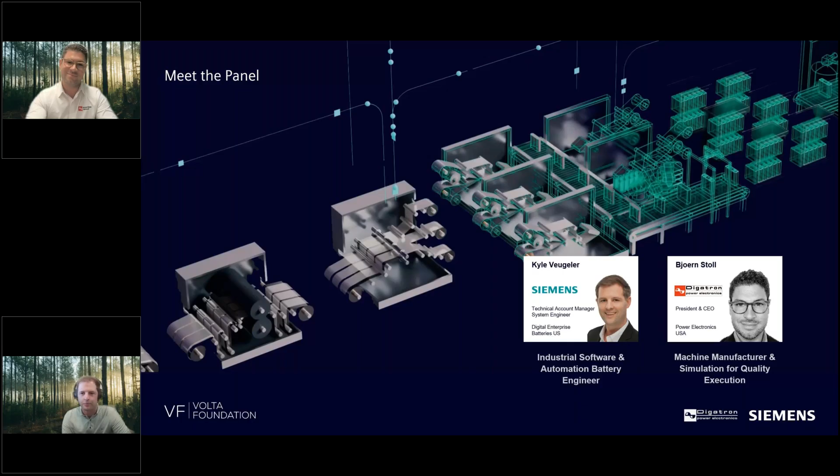Myra essentially came to us in both Digatron and Siemens and wanted to put something forward to the industry in terms of digital twin, some of the R&D design decisions that are coming out of lab environments, universities, academia. But how are we taking some of those findings using digital twin to actually go through that Death Valley gap of going into production, basically turning a coin cell into an actual cell for production for people to use within industry.

Some of the key takeaways that we've identified, both myself and Bjoern, were what can we do to use some of these tools for accelerating manufacturing ramp up, and for the design and production synergy. I want to make a call out here in terms of some of those design decisions becoming exponential downstream to many different stakeholders. Thirdly, the global partnership for production scaling, where Digatron's really going to speak to what they do with manufacturers, tool builders, system integrators, looking for some of the solutions. And then also enhancing market readiness in terms of what we're using on those digital twin systems, how to improve, iterate, and better the next variant of those tools.

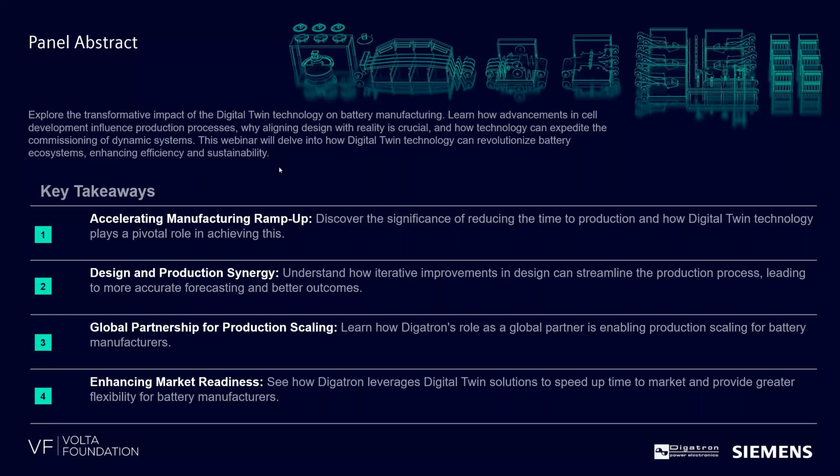Okay. So firstly, I want to explain my role within Siemens as a technical account manager. I tend to be a guide in some cases. Sometimes it feels like cheating. I've done a lot of these problems over and over again for the last 5 years at Tesla and others. But a lot of these customers are really starting to understand the value of digital twins. And every battery manufacturer, tool builder, system integrator is at a different point in their life cycle of defining the problem, solving the problem, and then expanding that problem solution set.

I want to give the industry at large here on the call today an idea of what I'm seeing, regardless of customer, form factor, chemistry, what we're asking ourselves and how we're helping solve some of those problems. So firstly, a lot of the simulation of old from aerospace and automotive really becomes what are the limiting factors, or front-end engineering simulation tools to define some of those key metrics. We do this in academia, we do that in research and development. We do this to define what it is we're trying to achieve on a simulation basis.

Also, the one that really has been a foothold over the last decade has been, how do I calculate my orchestrated operations? If I need to do 5 gigawatt or 10 gigawatt, how many tools do I need? Do they orchestrate well together? Is there a need for a buffer system? What's my consumption rate? That has been a simulation tool we've been using within industry for many years.

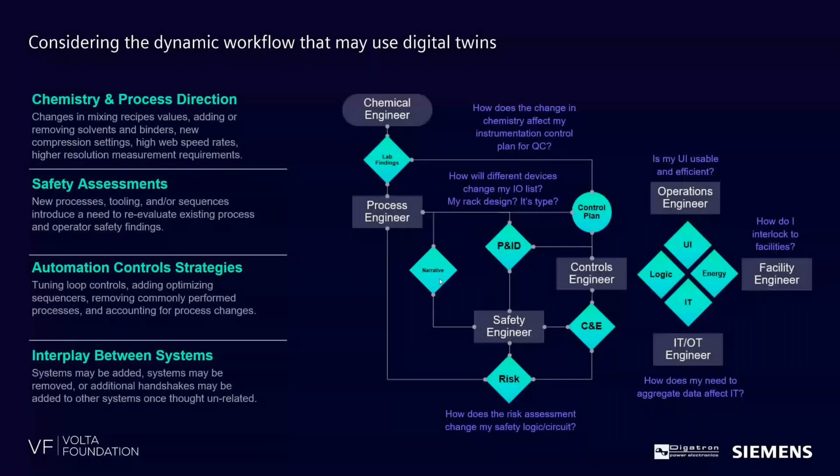I want to give an example of how that becomes a problem at scale. So say you're in the research and development team and you're looking to do something as simple as, I want to change from NMC 811 to NMC 955. You're not going from NMC to LFP, you're not going from pouch to prismatic, you're not doing a vanadium battery change from a lithium ion, you're just changing the recipe within your dosing.

But downstream, you start to see drastic effects as it goes down to the different organizations, and it becomes exponential in nature. And I'll explain why the simulation tools and how they're interconnected help bridge that gap.

So in NMC world, you're going to change something like the amount of kgs of your binder, active materials. Those will have different physical properties, and they will have possibly different means by which you can measure bimodal distribution or compression or thickness of your electrode. Everything will change based on just changing something like this. And you're changing that for that reason, to actually have a better battery.

Now, what those teams in R&D are doing is they are trying to solve for these key quality gates, as it were. Like, we want to have a defined particle size or a different modal distribution or a viscosity or a granularity test for dispersion. They're defining based off this, those will change.

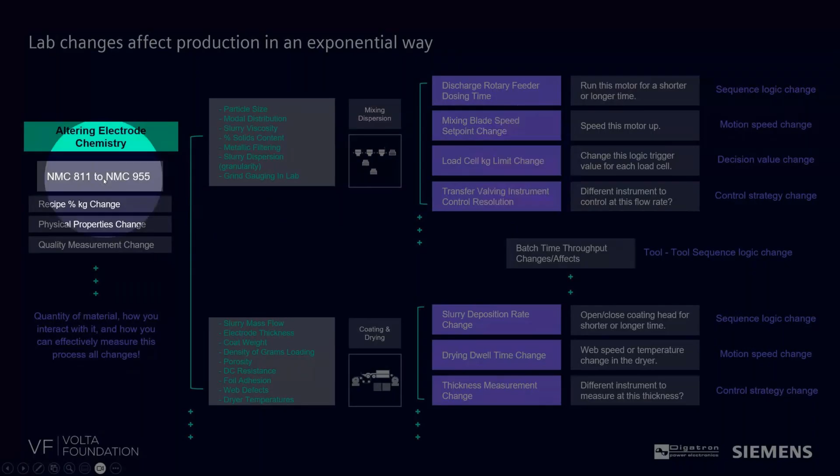When it comes to the controls and automation side, and even the mechanical side, a simple change like this can change, okay, my dosing time is radically different now. I need to change the program by which that machine runs, and now the startup and shutdown of that tool affects an upstream or downstream tool, and so on and so forth.

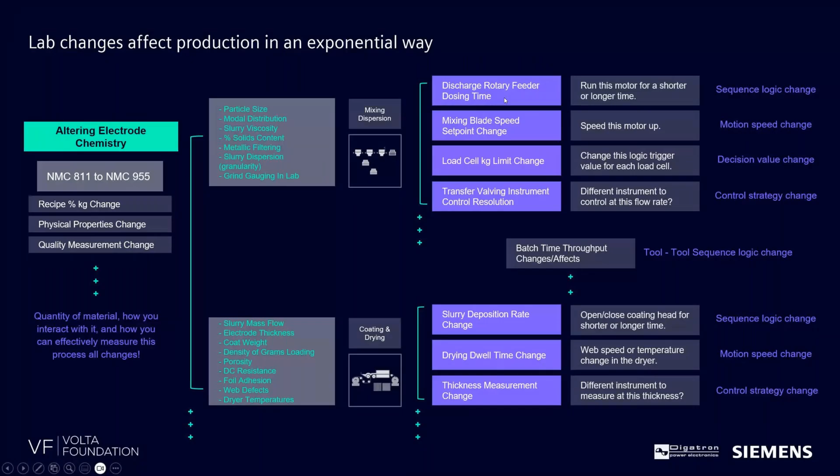But the goal here, I hope the team starts to take away, is that a small decision, asterisk on small here, from NMC, just the dosing recipe or the chemistry, massively affects people downstream. Now, how do we tend to see this play out when it comes to industry?

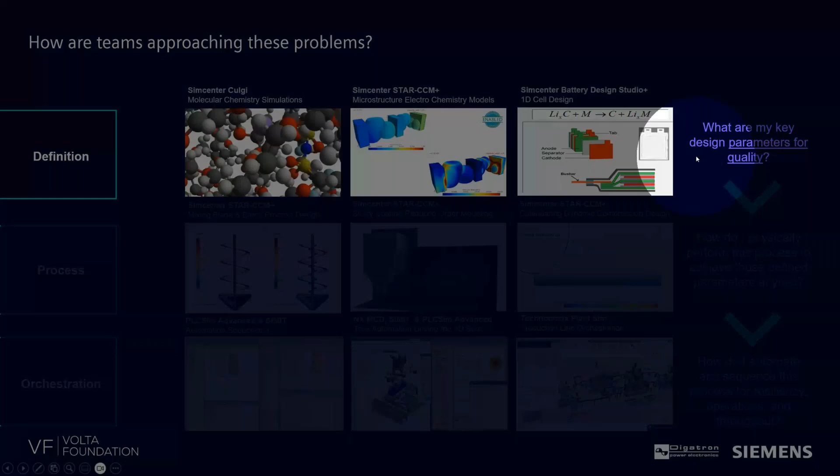There's three main hallmarks when you're tending to approach this problem. Your organization might not have the stomach to digest how big your appetite might be, but more or less this holds true. The beginning stages of defining what is your chemistry, what is your process, those teams are looking to solve for what are the key parameters for quality. What are the things that I need to attain in a coin cell that I need to take out of a lab into mass production?

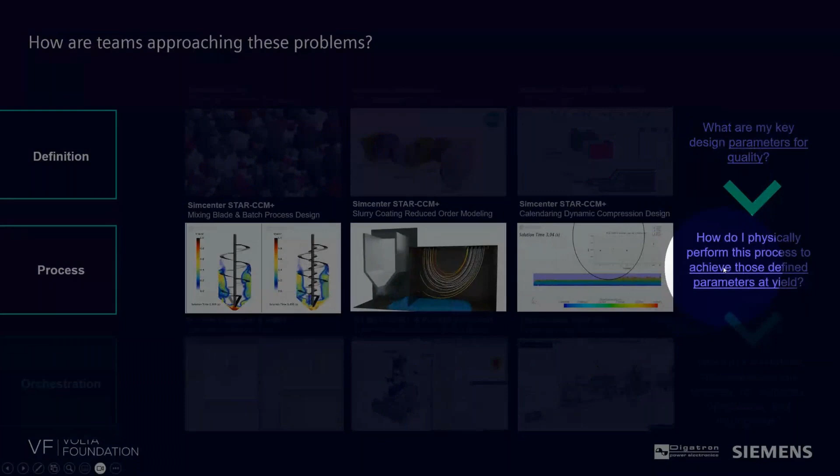The second wave tends to come with defining your process. Simulation tools here tend to be focused less on what are the key parameters to build, but more so how do I define the process by which I can do this at an industrial level, at scale, at a repeatable, resilient level. Within Siemens, we have aspects like CFD modeling or full-blown front-end engineering, multi-day, multi-hour simulation tools to define this, from atomic all the way up to CFD modeling.

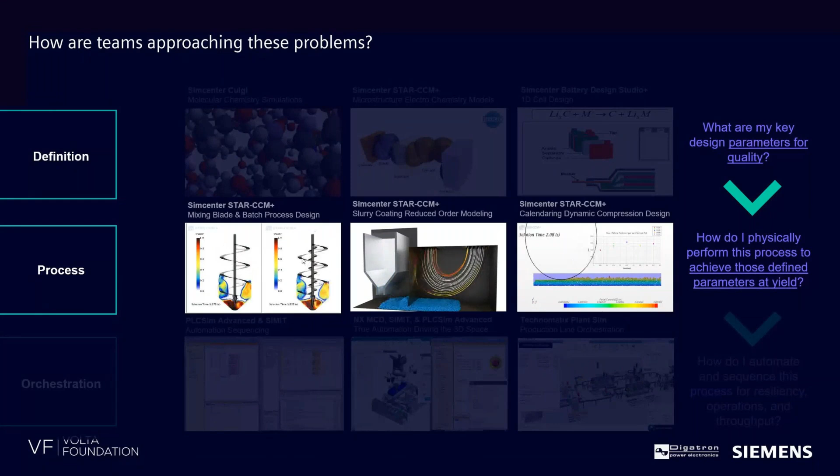Now, this is an art form, to say the least, but what we're starting to see in battery today is the tie points of that front-end engineering into the actual automation and how we can play with that interlock system.

We're seeing a mass adoption here in terms of simulating the automation and the manufacturing tools together. So when it comes to orchestration, you may want to simulate something like the PLC to validate the startup or shutdown sequence, a safety event, an e-stop event. This becomes far more important when it comes to battery and some of these continuous processes.

The analogy I tend to tell people, or use case I tend to show people, when we design safety for these tools, let's say it's a compression system, and I have a large calender. When you have an e-stop programmed into that system, A, they take hours to start up and shut down, but B, the e-stop is meant to protect your operators, or possibly the process in that case. There may be a hidden ramification for that e-stop.

Say you hit that e-stop, yes, you protect an operator from being crushed, pinched, whatever that might be, but it might come with a $100,000 price tag to resurface your calender facing over in Switzerland, or something to that effect. Being able to simulate, A, how this tool individually handles startup, shutdown, safety, how it works by itself, is important. But especially when you go to the gigafactory scale, how does my mixer dose into my compression system?

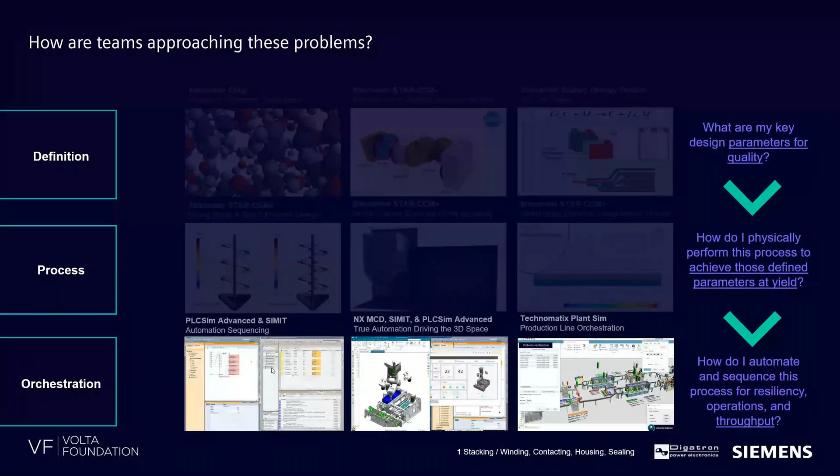How do my compression system and my coating system feed into my slitters? When I have these different tools, how do I work them together? This is where we're starting to see a lot of adoption in the industry in terms of validating this today. Hallmark here, like I said, there's front-end simulation tools for defining what your quality is and how you build your cell. 2 is the process by which you do that at a scale. And 3 is defining what your throughput is and how does it all work together.

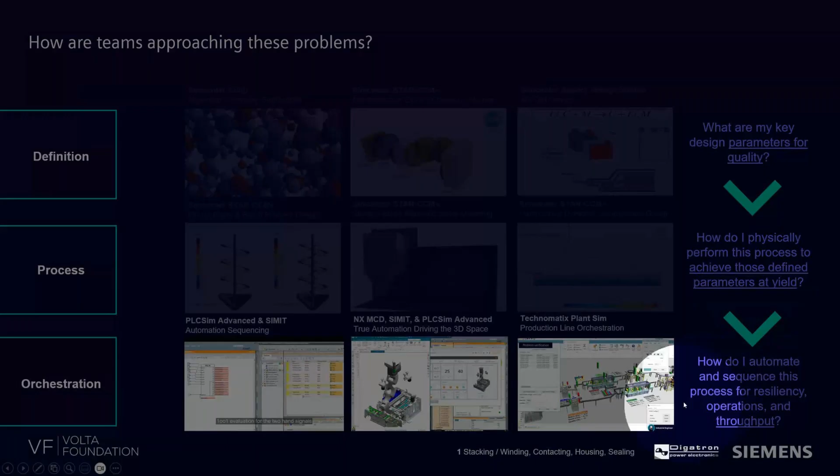So you're looking at quality first and foremost. Second, yield. If you're going to be selling batteries and you have 10% yield, you're going to go out of business. 3, throughput. You're a battery company. You might as well have a good throughput in terms of producing cells that you're looking to achieve.

Now, I want to give an example of some of this proactive validation that we're seeing across the battery side of things. This is an example of tying those simulations from a top-down approach towards the production line. So in this case, this is showing that play and how they somewhat overlap and can feed back into each other to characterize maybe I need a twin blade mixer, or maybe I need a different 40-ton compression on this electrode film because I have a different ratio up here. In this case, you might change your recipe. You might have a higher compression percentage that's required.

You need to validate if I add Si, or silicon, if I want to go down this road and alter the more modern anode side of things, getting into the material properties like a Young's modulus and looking at thermal conductivity. This tends to live in this world up here. But you're still solving for something that these need to achieve.

So if you take nothing away from today, there's many different digital twins and simulations that are available to you. Not everything is one size fits all, because you do need massive data modeling to do atomic structure simulation, where you don't need to do that when it comes to other applications. But those key parameters that you're defining up here are what this is achieving. So this is where we link them all together at Siemens today. So you're analyzing, you're finding these parameters. This is that Goldilocks zone of this team interfacing with the other teams.

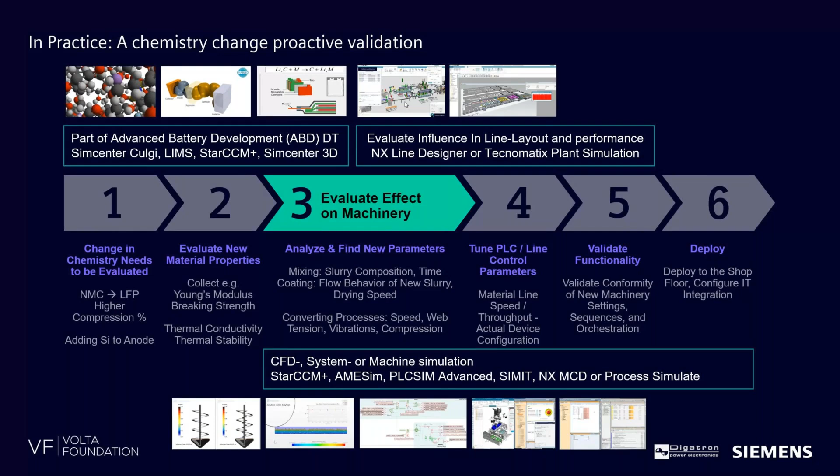In the past, if they weren't linked, someone would change something down here. It would not be reflected in the main line throughput design. Like, say we change a proximity switch on a pallet. This is no longer equivalent to what's on the production floor. It can die and wither on the vine in some cases here.

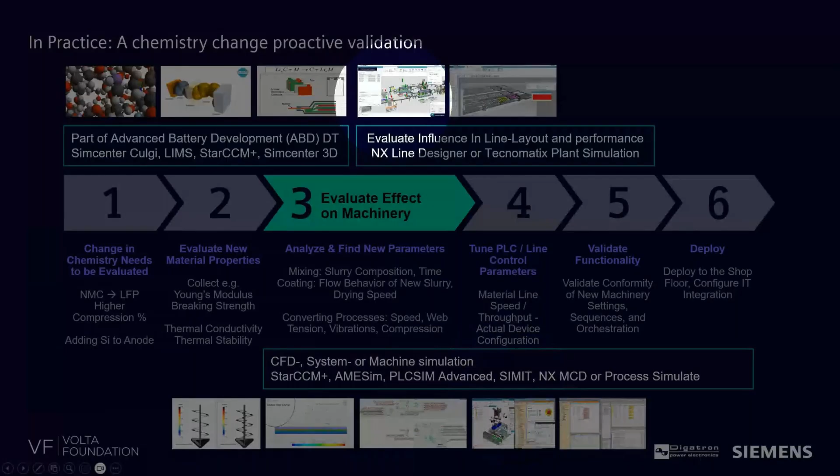Those organizations have a really good understanding of what it is they're trying to achieve for the parameters set. That's great. In most cases, you're starting to see, I have an idea of what my line needs to be, how I should size it, how many lines, but they're black boxes. And then they look out to tooling suppliers to say, hey, solve this one box of the 20 boxes according to my parameters.

And then as that process plays out, you start to understand, I have no idea maybe how that machine works at the fine-tune level. I have a general idea of this tool. I have a really good understanding because maybe I have a novel process on how I coat or how I do a certain process in the system. But you're starting to get a general idea of how those work together. And this is really where the problem of simulation tends not to take too much of a hold.

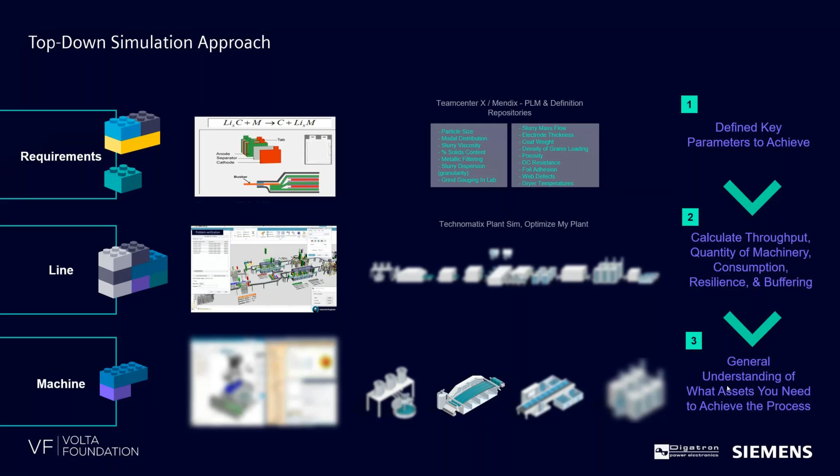The modern advancements of the last 4 years in our communication speed and compute capability allow us to go to this bottom-up approach as well. So you can still start with the top-down, rough it all out into these different chunks that you can solve and move forward with. But now that we have the ability to take the PLC data and the actual automation quality parameters, we can start to push that back up into that production line model instead of, I have an 80 meter a minute metric for my coating line.

No, I want to tell you the exact speed reported from the servo drive on my coating roller journal, my main drive line. We're bringing those into the line simulation to say, sure, you can simulate it. We can now take it and characterize that based on real world characterizations and observations.

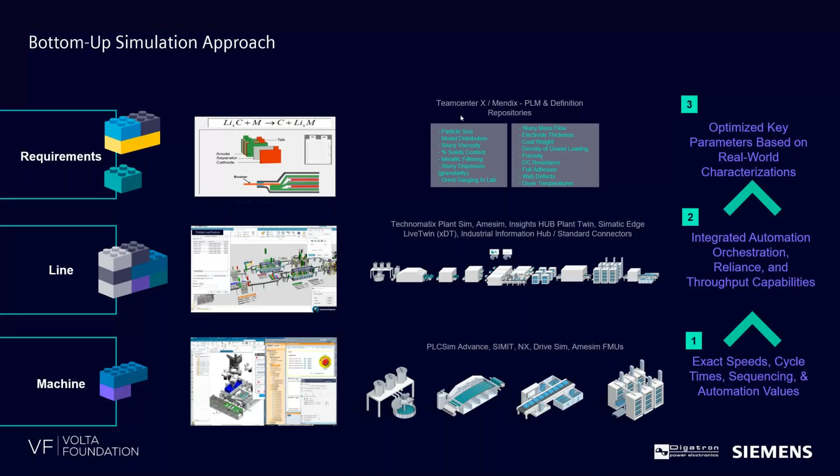And what you're starting to see is you can actually go through and figure out bandwidths or phases or gates that you can see on the different particle sizes. If I go past this threshold, I really need to radically change my production line or my manufacturing tooling provider because of this. That is incredibly important for the team to hopefully take away here.

This here is kind of an overview of what I depicted earlier. It's really more an aspect of, I want to make sure people understand there's definitely a time and a place to understand what is my simulation in the early days for understanding the atomic structure of my cell, maybe a smaller market, more niche. There is an OEM tool builder system integrator suite in terms of understanding how should I design this specific tool or optimize it or iterate upon that.

And then also lastly, there is a massive push for creating digital twins to validate sequences. Me personally, I did not want to go do a factory acceptance test over in Korea or over in Switzerland, wherever that might be. If I can virtually take a look at this program, validate it is correct for what I need, I'm not going to go over to a supplier, yell at them for color codes and naming conventions on the automation. I'm going to use my time well.

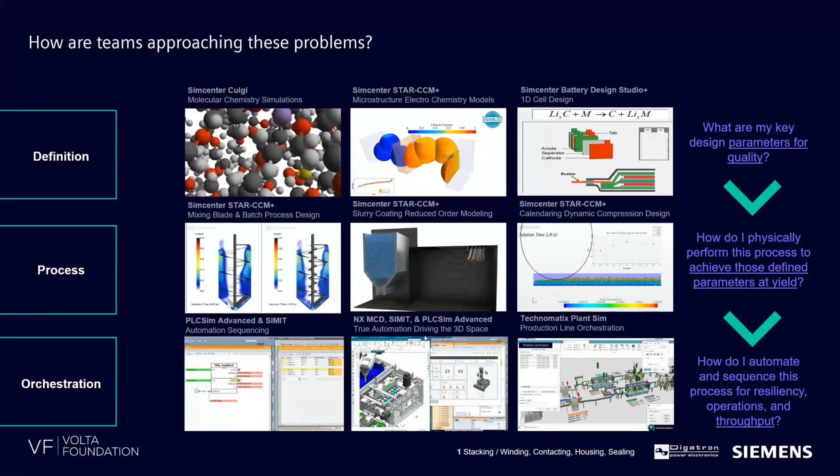Second to that, operations for battery. All of you are very familiar with this. We tend not to want to start and shut down these production lines. So training your operator and your workforce in a virtual environment that doesn't have a ramification for an e-stop or a plugging of a loss-in-weight feeder, whatever that might be, really de-risks your operations and training and your iterative design for the future.

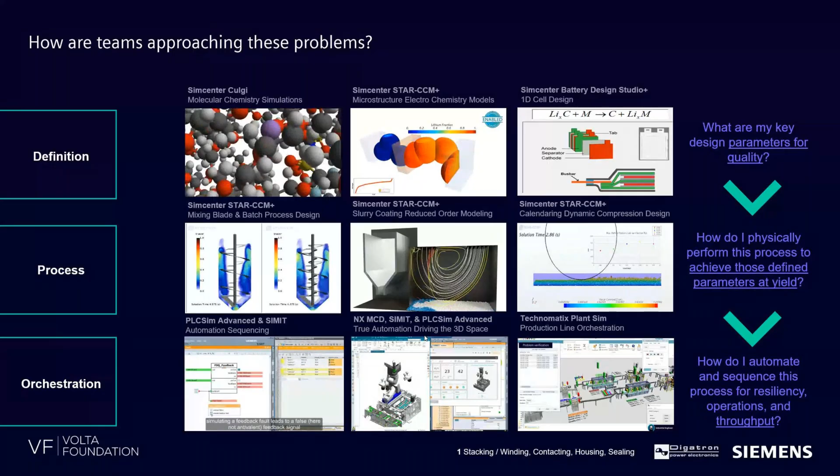Lastly, what I'll say with this is more of a US topic. I'm seeing a lot of manufacturers. Maybe you're a tool builder and you source to Georgia Pacific in the converting industry, or you do food and beverage boxing like a Tetra Pak or others. They know web handling and coating quite well, honestly. They're looking to say, hey, what if I just throw electrode into this instead of pulp and paper?

The digital twin allows them to create their tool, validate some of those metrics in place of saying, I want to buy a $3 million CAPEX, build the tool, then figure out if I can do this and sell it to someone. This is one of the unlocking aspects for tool builders within the US today to say, can I move from that industry over? I don't want to bring lithium into my building.

I don't want to spend $9 million on a formation, aging, and test structure and float $9 million for a year long. I want to create this, show it to my potential customers, and I've already done 30-40% of the design work for when they give me a PO to move forward with this. So it's really helping deleverage industry adoption into battery as well, which has been really helpful in the US.

Okay. Aside from that, I wanted to paint the ecosystem as I'm seeing it across manufacturers, OEM tool builders, and system integrators. Now that we can understand at least the ecosystem of what people are asking and the take rate for things, I really want to hand this off to Bjorn, who can speak to what they've been doing at Digatron in terms of the tool design and using some of the digital twin aspects.

Bjorn, it's all you. Thank you very much, Kyle, and handing it over to me.

As we discussed at the beginning when we prepared our presentation, my focus in my previous role was using Industry 4.0, IoT, Internet of Things, digital twins more on how we can increase productivity. This has changed after not only our conversation, but also in the market, talking to our customers. And the major topic and the major focus is safety, risk management, and quality.

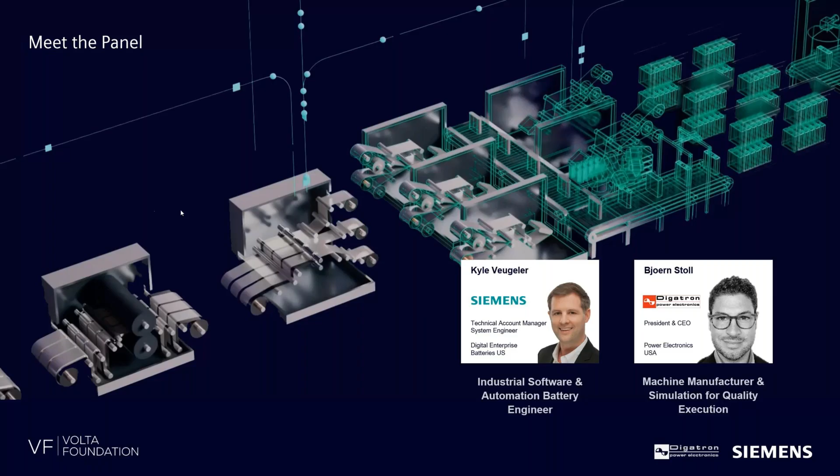Risk management on the financial side, on the downtime side, and that includes also what you have presented on the change side. But as a manufacturer of machines, we are focusing on the development side before we are building the machines. So if you go to the next slide, please, we have an example of how we are doing it at Digatron. For example, over here on a pouch cell. So we are starting the dry side. That means that we're starting on the anode and cathode cutting side.

Previous topics which Kyle presented, mixing, changing chemistry, are impacting us later on. And that's the reason why a digital twin can help us in the entire planning phase where we need to focus on safety, quality, and risk management. Hence, we are starting with single station units on cutting, and then we go through the entire process flow. This is only for pouch. We have the same for prismatic and for cylindrical cells.

And while we are having single station units for every process step, it helps us and the customer to really see in the development phase where they need to have automation, where they need to increase their safety aspects, where they need to change something before they're making the investment. And that's the reason why I'm talking about risk management from the beginning, to avoid investments which they're later not able to use or need to change when the customer has installed the units in the factory or in the development lab.

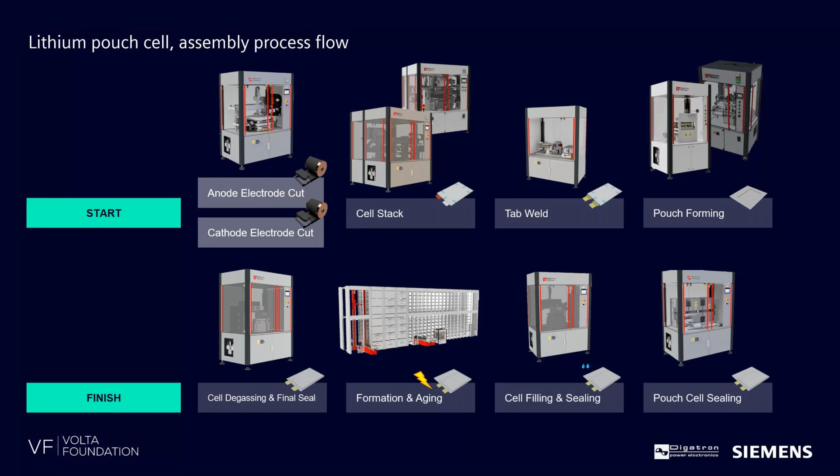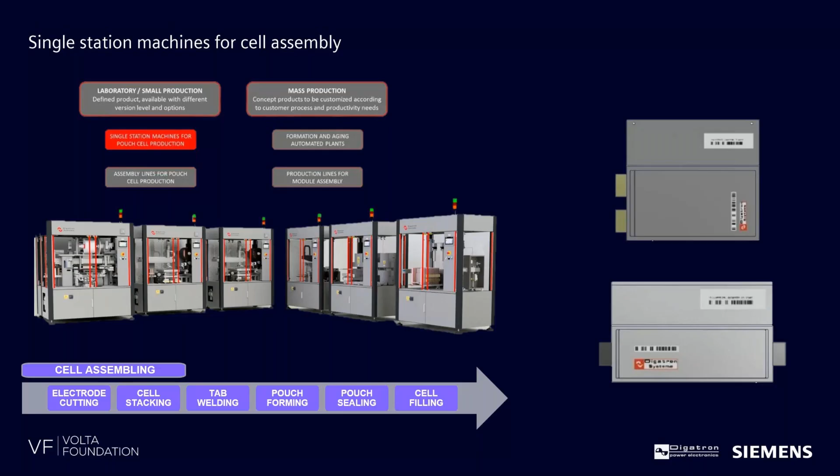So hence, we are going to the next slide, please, Kyle. We have the single station units on the lab side. Later on, we are going into mass production, and that's the reason why the digital twin can also increase the amount of cells you're producing every day. So you can scale it up, and you can see where in the process an automation makes sense, where you need to have quality inspection in place in the process, as well as where you need to increase the amount of machines to achieve your manufacturing output and quality you have promised to your end customer.

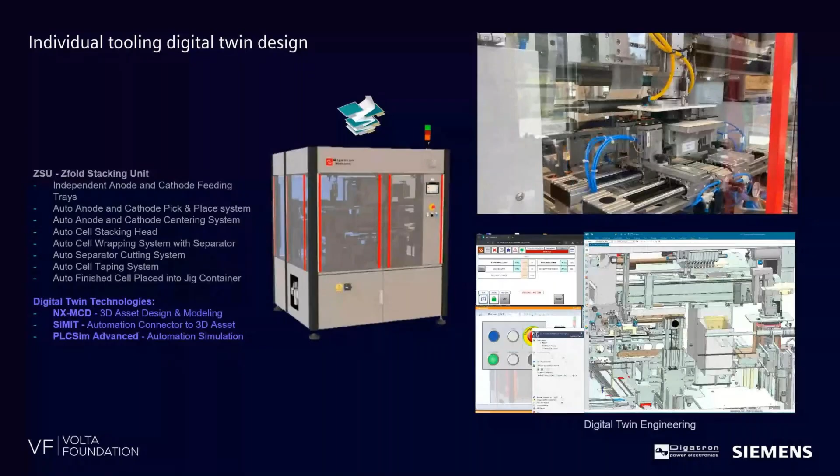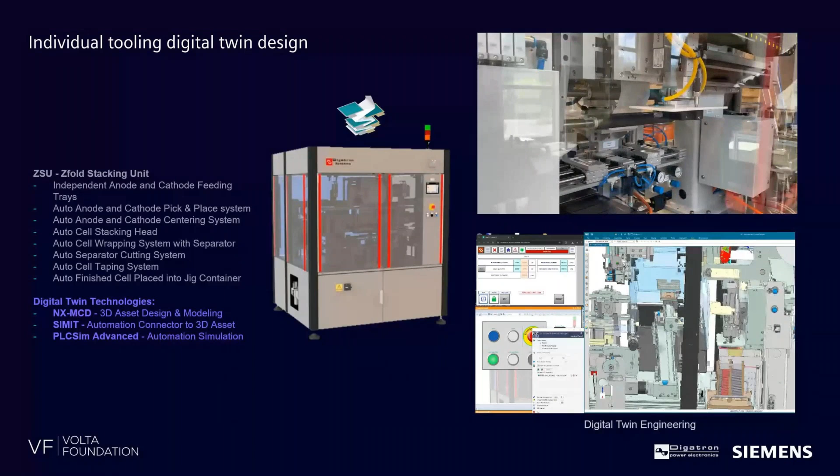So for example, we have over here a Z-folding stacking unit where we have a digital twin on the right side below, where we started to simulate the entire process to do Z-folding above. So you can see below the digital twin is showcasing exactly what the machine at the end is doing when we have installed it at the customer side. And we are using the simulation for all machines along the entire process flow, which I have shown in the slides before. And we are analyzing where we need to increase speed, reduce speed, to have for each and every process step the entire quality parameters fulfilled.

Kyle, would you like to go to the next slide? Perfect. And talking about later on, while we're having for each and every process step a single station unit, we can increase our capacities accordingly and automate it when we have the digital twin along the entire value stream. Hence, we are using the machines and putting them all together and doing the automation according to the customer's requirement, where they don't like to have manual handling. We're doing an automation and a conveyor belt handling.

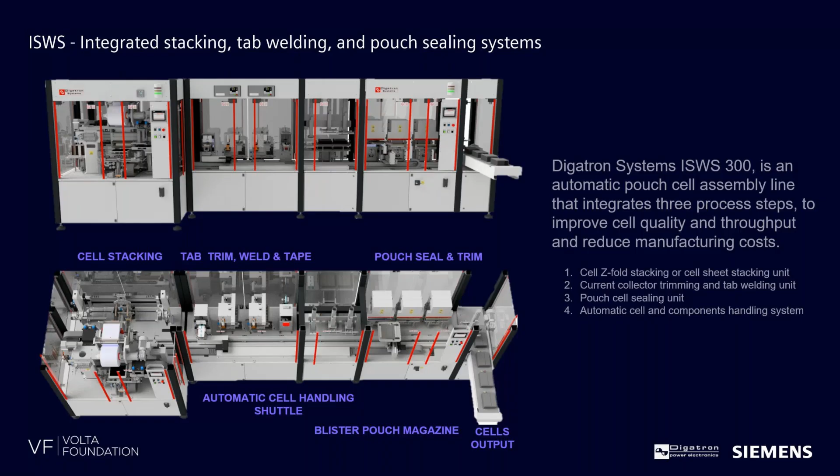Once we have manufactured our cells, we want to evaluate the cells. That means not only for incoming cells when we have the cell manufacturing process outsourced, but also when we're producing cells before we go to the formation.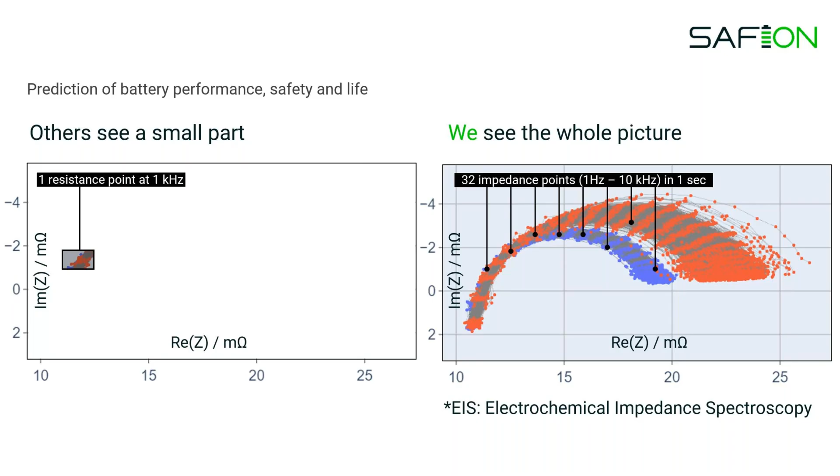On the left side, you can see a conventional impedance point, 1 resistance point at 1 kilohertz. With our system, which we are installing, you can click on the right, Kyle, please. We can show 32 impedance points per second. This helps us to really evaluate the cells and predict the lifetime of the individual cell before we put them into a module and then later into the pack.

When we go to the next slide, Kyle, you can see an example of cells coming from the same batch, but each and every cell has different quality parameters. Hence, with a digital twin, we are defining the ideal quality level of the cells we want to produce, and later on we can measure it against the reality.

On the left side, batch 1 has a longer lifetime, batch 2 has a shorter lifetime. Hence, we can do the cell grading and put the batch 2 cells in a module, avoiding mixing batch 1 optimum cells into a module and making the module and the pack weak at the end. On the right side, we can see the instant battery lifetime prediction. This runs against the model we have created in the digital twin, which runs against the reality.

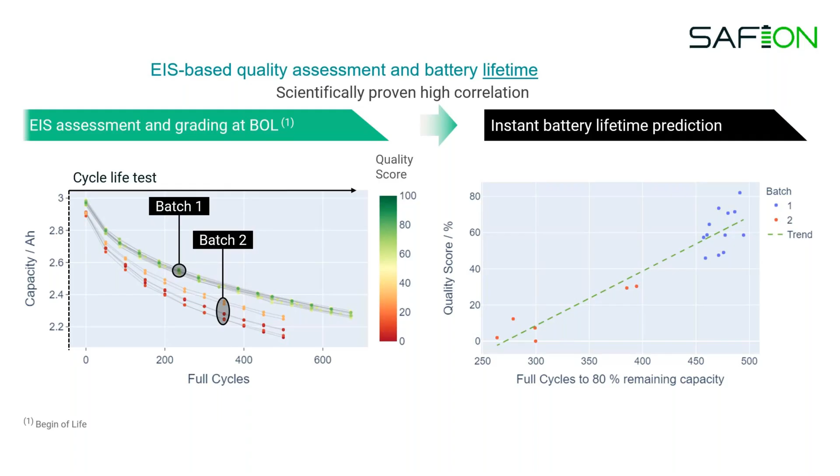These process steps make it possible to do the cell characterization of a single cell, or a string characterization where we put multiple cells into our system. While we are doing the electrochemical impedance spectroscopy, we are measuring current, voltage, temperature, and cycling the individual cell through the required formation process and/or for a lifetime prediction of the individual cell.

If we go to the next slide, Kyle, this will help us, and most important, this shows the customer how to avoid unnecessary formation and aging, which is one of the most expensive parts when you have produced a cell that does not fulfill the characterization defined in your quality characteristics. Hence, we are installing our EIS measurement system after the cell manufacturing process, before the formation, and according to the quality process definition also after the formation, before the aging.

Coming back to the digital twin, what we are doing with the digital twin is showcasing here the entire process flow. Can you go back, please? One back.

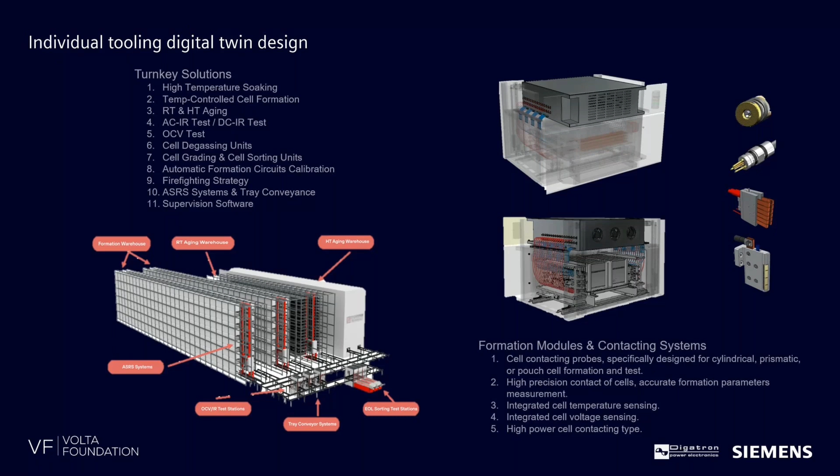Perfect, Kyle. Thank you. Can you go to the next slide? Here is an example, and I'm not sure, Kyle, if this is a video as well.

We have used the digital twin design to design a warehouse, to design the formation process, to define the entire material movement between the individual steps before and after the formation and aging. Kyle, would you like to explain how we have done it?

Yeah. So circling back to what I was talking about earlier in terms of this building block approach, going from the bottom up, what Digatron has been doing so far is we are simulating the PLC. Then we're simulating how the PLC actually moves mechatronics on that side of things. That was the single cell station that we looked at earlier.

And then when you start to scale, you're using those same assets, but it's pulled from actual automation, actual characterized events from production, so that when you start to get to this throughput line design aspect of, okay, where are my bottlenecks? Do I need to add more pallets to the line or remove them? Do I need buffers?

Or one recently was my anode and cathode coating line. My cathode is 3.1 meters and my anode mother roll is 2 meters. So even though they run at 80 meters a minute, you need a buffer on the one because the cycle time is going to be different. This is where you start to see those building blocks start to work together on the bottom-up approach.

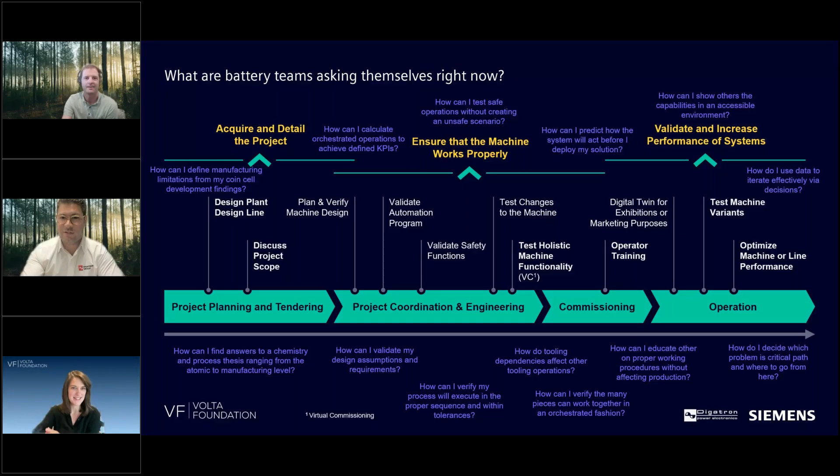15, 20 minutes of questions. It's like a thesis defense. Are we ready?

I'm all for it. All right.

So I've noticed a few questions coming in around chemistry, so upstream chemistry, and how this may affect the downstream processes. One specific question around line speed in chemistry. So let's start the discussion with: if we're talking about beyond lithium, different chemistries, alternate chemistries, how does changing one element or parameter within the chemistry impact the downstream processes?

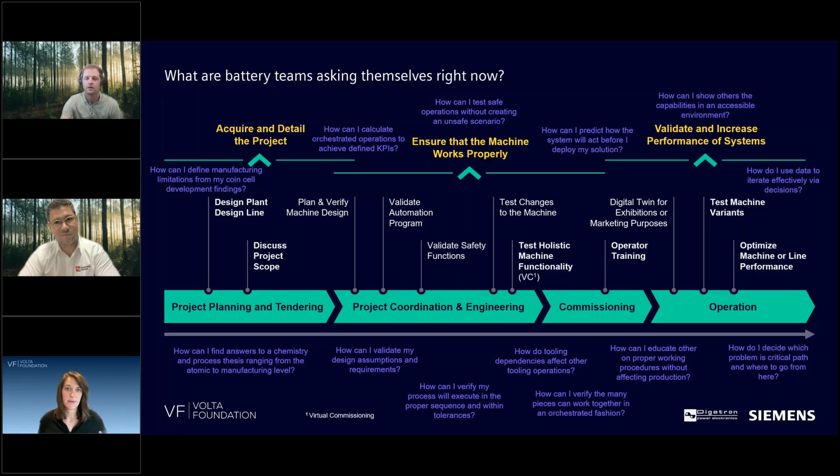Yeah, I'll take that one, Bjorn. This image here, I think, is a good depiction of that. So, like I mentioned earlier, you might change your chemistry. Therefore, you might have more metal in that composition when you're mixing or whatever that might be. That's going to change your slurry, or if you're doing a dry process, how your compression is going to be forced on more metal to compress. So you might go from 10 tons of force to 40 tons of force. That changes how we program motors, how we program instruments. Can we even measure at that thickness of what you're trying to achieve? That starts to be the downstream effect.

So we can simulate in the front end engineering what should be my new compression force. We can go into our automation in our 3D environment and say, can I even achieve that? Can I turn the motor up high enough? Can I even get there? Where are my limiting factors there? And you can pre-validate that in some cases.

And plus, obviously, changing the chemistry is having an impact when you're producing the cells, and also when you're doing the formation of the individual cells, because the formation profile will change or may change, and the formation process takes longer.

Okay. Thank you. And then, did you guys touch on... it's having an impact, you walked through. So specifically to line speed, are we able to comment on specifics on line speed? Yeah, I'm not sure. Yeah. I'll take a non-NDA, IP-tied answer to this one as best I can.

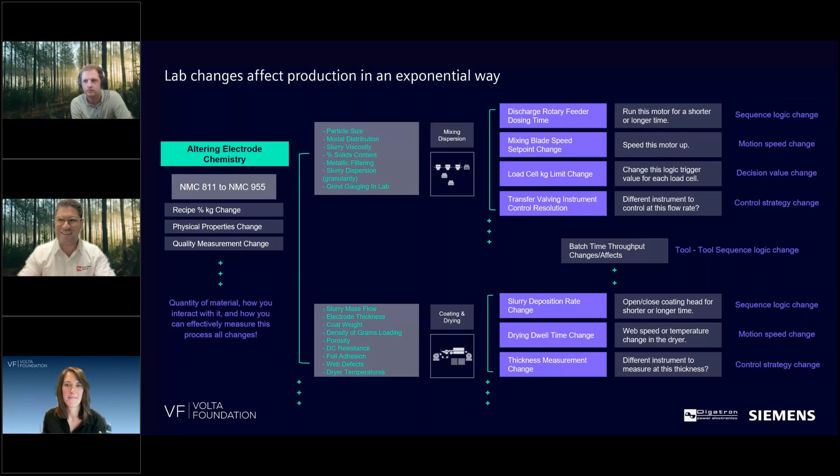Do you want to go first, Bjorn, or do you want me to go? Yeah, just one comment, because it's the big advantage, and I have seen another question which I liked: how can you put different machine manufacturer equipment into the digital twin? This is an important factor, because if you have just one manufacturer in line, you can't predict, and that's the reason why it is so important in our point of view to have really turnkey solutions and work with other companies together to really work on safety.

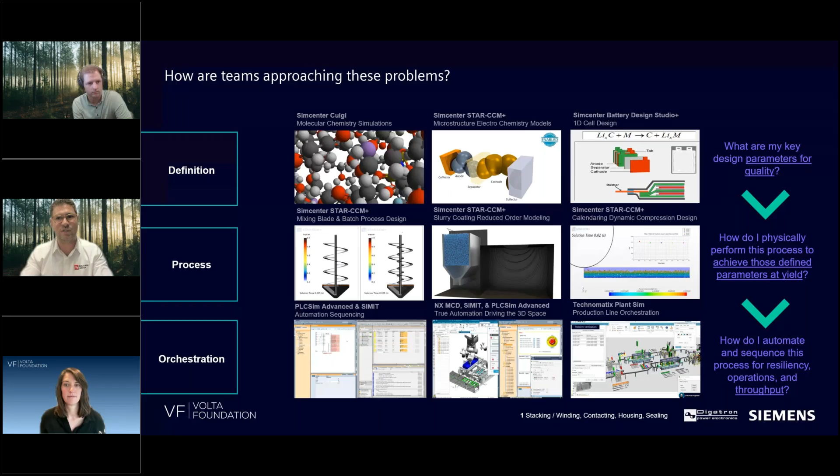And safety is the most important factor in the entire manufacturing process, because if there is a fire or people are dying because of any kind of event which would be possible to protect against before, if you would plan it in a proper way, I would say including the entire value stream in this digital twin makes sense to at least foresee some catastrophic events. Just my comment before Kyle's explanation on how to do it. Yeah. So catastrophic is a bit nebulous, right?

But yeah, when it comes to this, what I will say is, in terms of the actual automation simulation, I'm seeing a big uptick on this being part of that conversation. So what do I mean by that? A startup and shutdown sequence is very coordinated for your production line. Say you lose a connection to an abatement system, let's say an ammonia scrubber on a coater. You cannot run that coater. If something fails on that, you do not want ammonia in that building.

In formation, if you're simulating that process and you want to just check, hey, what happens if I lose connection to fire suppression? How does that affect my production line? Or if I have a thermal runaway event, how can I simulate that in terms of like a mass flow calculation and CFD modeling? That's a very advanced version of this example. Or it could be as simple as, I want to spin my blades at 1800 RPM. Can they do that under that strength tolerance, or am I going to shoot a blade through a wall here? Validating some of those catastrophic simulations where, no, you do not want to do that on the production floor doing DOE trials.